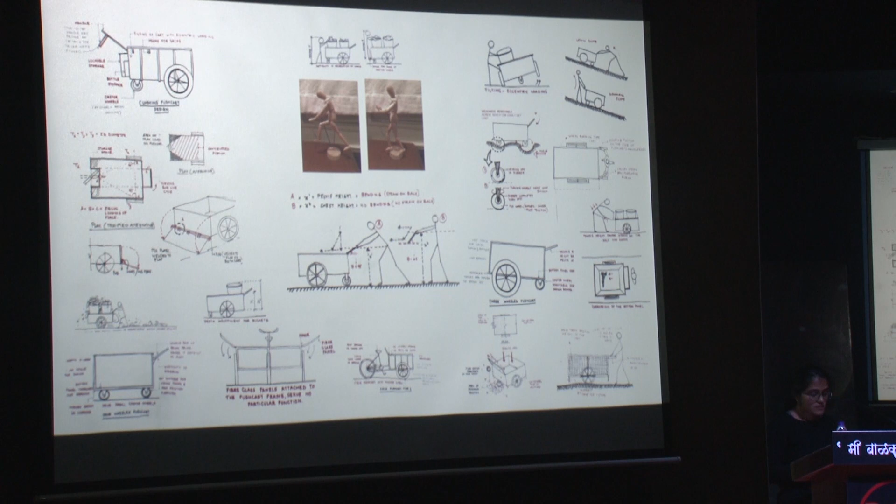So the first part was about understanding the mechanical aspects of the design of push carts, retrofitting existing carts to fit the ergonomic analysis. We consulted physicists, mechanical engineers, orthopedic doctors. It included parts of the cart like handle height, type of tires, non-corrosive material for the chassis, ease of lifting and dragging waste-filled buckets onto the cart, and analyzing waste pickers working in different topographies - uphill, uneven roads, etc.

And it was observed that there were common issues relating to different aspects of the push carts, apart from variations in the topographies around Pune city. So the simplest way to approach the first phase was to retrofit the existing cart, considering lower costs.

The surface that received the most wear and tear was the bottom. So we experimented with aluminum sheets, varied the thickness of the gauge of the mild steel sheets, replaced the sides with perforated CRS sheets to further reduce the weight, and increased the depth of the chassis, so that when the buckets move, there is less spillage in the cart.

Replacing door hinges with gate hinges, all very simple things. Fixing swivel wheels of different diameters and material, like some in rubber, some in PVC, and with different gauges of brackets. The diameter and width of the main two tires was experimented with, and the bearings inside were also experimented. These retrofitted carts were again at the end of 3 months given to the waste pickers to get our honest feedback, and they were very honest with it.

We also developed a bamboo cart, because bamboo is lighter in weight than steel, and this would put less stress on the waste picker pushing the cart, and also less stress on the 3 moving parts below. But this was the most expensive option.

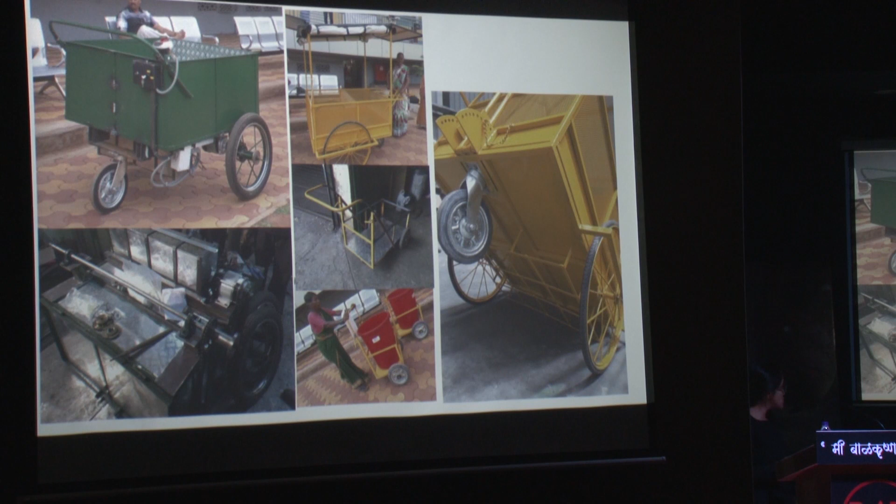Then we developed an electrical push cart with varying speed, where the waste picker could vary the speed and it could run according to their own walking pace. We designed this around 2016 or 17, and it was the most favorite among the waste pickers. If developed today, I'm sure it would be a much lower cost option given the progress in technology. So this is the honest feedback we got from the waste pickers.

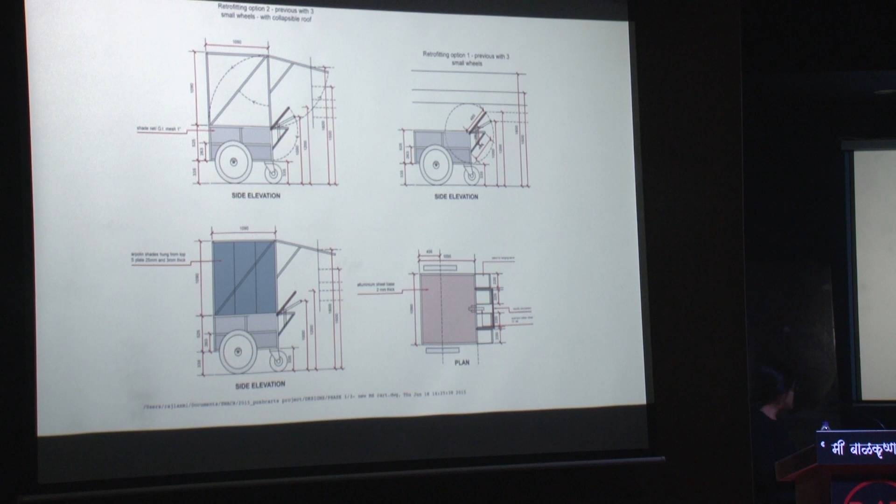Then all the drawings of the 9 prototypes were submitted to the PMC. After a lot of negotiations, about 2,000 or 3,000 carts were made, except for the roof. That was maybe 50% success, you could say. But the loop could have been completed by giving a maintenance schedule for the cart.

Then the second part of designing the infrastructure was a mobile or modular sorting shed for about 2 or 3 waste managers. These sorting spaces are located in different contexts, outside big housing complexes, outside gated communities, institutions, or outside bastis. And there's this constant interaction between the waste picker and residents, who say they don't want sorting happening there.

So then we thought of designing a collapsible and movable mobile sorting shed, which looked decent from outside and where the waste picker could securely store her waste, and which could later be collapsed at the end of the day.

The waste pickers were pretty happy that this was the second infrastructure item designed for them, so they did puja and everything. 10 such mobile sorting sheds were installed across the city.

Then the organization said, okay, now maybe we could propose designs for temporary sorting sheds. So a space for eating lunch, a space for sorting waste, and a space for storing the waste was provided.

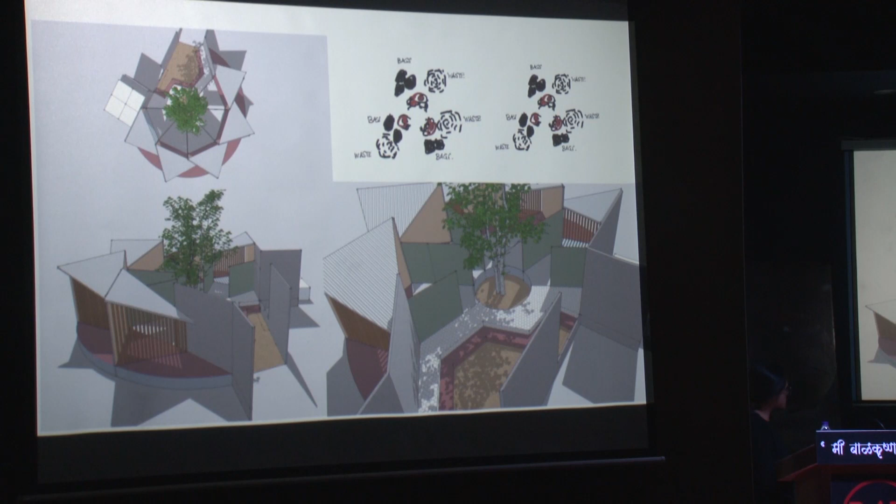One day it so happened that the municipal corporation was proposing an extension for an existing sorting shed for about 30 solid waste managers. The organization said, okay, we could propose a design. PMC was all okay with the design, but said they weren't going to build it themselves, so if we were ready, we could do so. Then I had to assume the responsibility as a contractor to manage the construction process of this sorting shed.

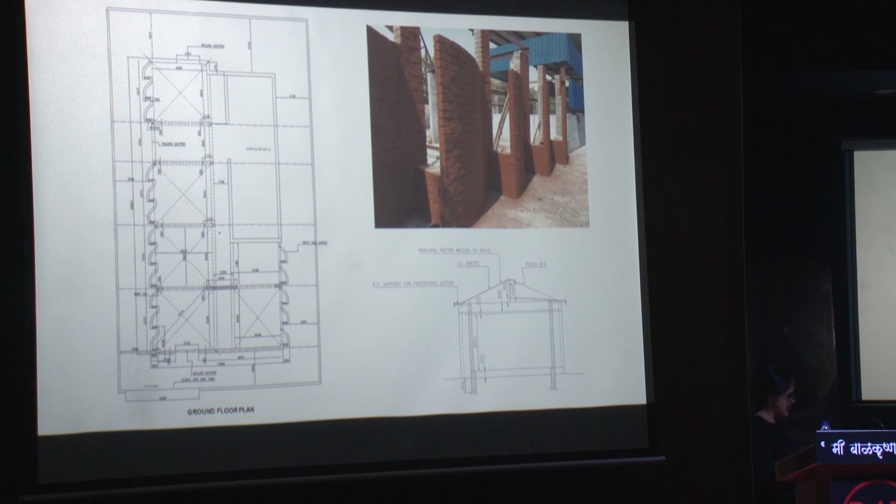Near Kapil Malhar, the design was very simple: the walls are made up of fins that face outside, so a person from the outside is not able to see who's sorting waste inside, while also maintaining plenty of light and ventilation inside the sorting shed so it doesn't get stuffy.

So the effort here was, we just don't provide a patra shed. Maybe we could provide something more, go beyond at every attempt.

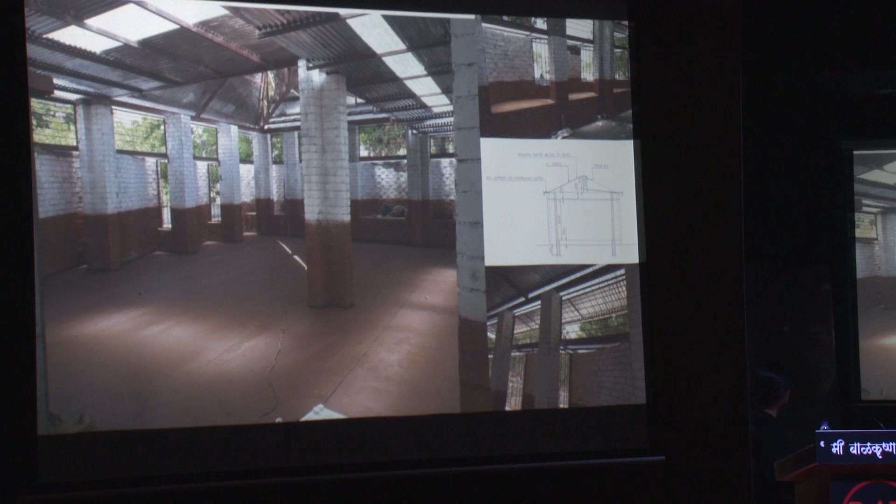This culminated into designing in situ basti houses for the waste pickers.

One day, Meera Waghmare came to me. I had just finished one interior project, and she was domestic help there.

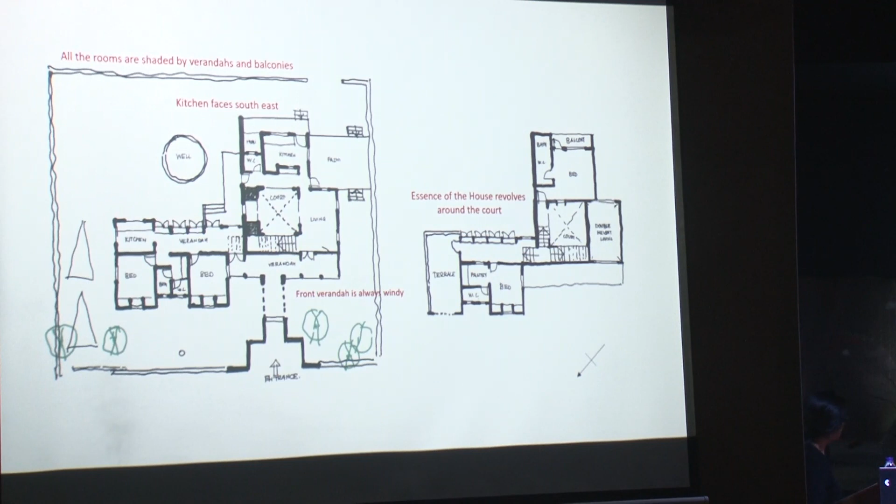The house has a stone wall here. The elder brother stays here and the younger brother stays here. The court is designed for the younger brother, and a deep open veranda is designed for the elder brother.

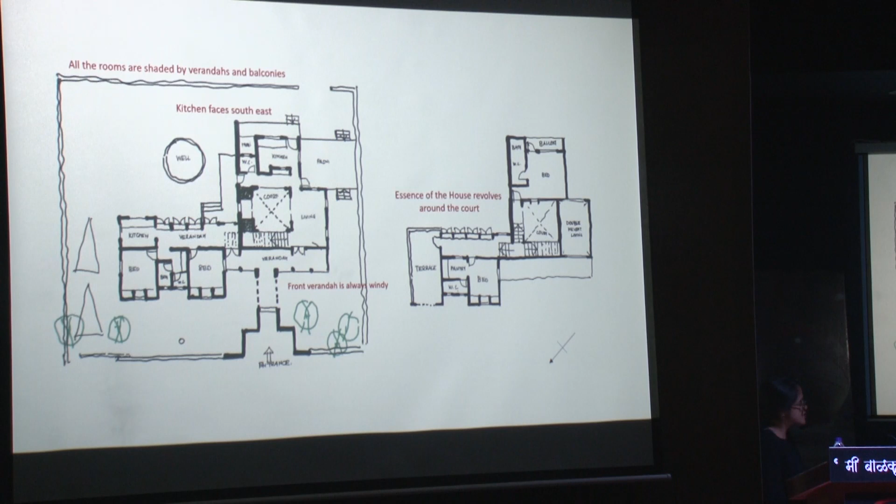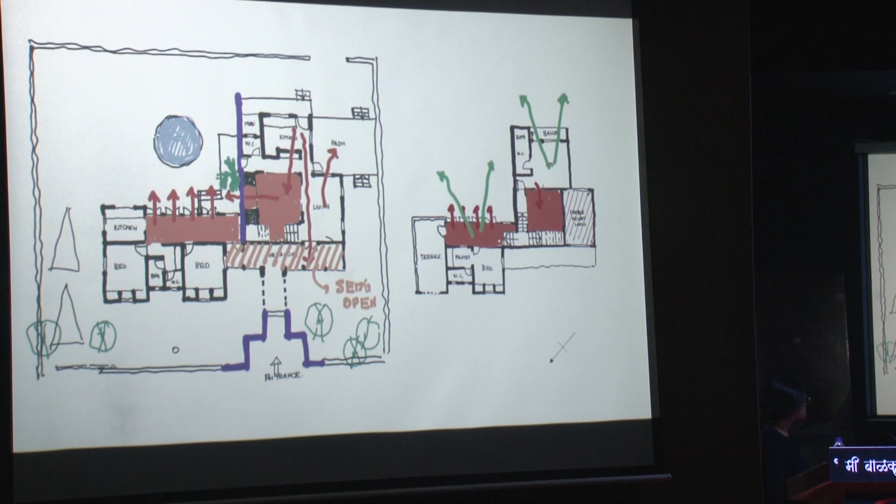So the design was also influenced by the existing well and a coconut tree next to it. And the house is looking away from the main road and towards the farmland. So it is all about, just to simplify it, because it takes a while to explain the plan of the entire house, I'm just going to skip through projects. Looking within, looking out, looking away, looking up, and looking down.

Again, here I wanted to reduce the embodied energy of the materials. We tried different cube tests by adding fly ash and cement mortar, reducing the cement.

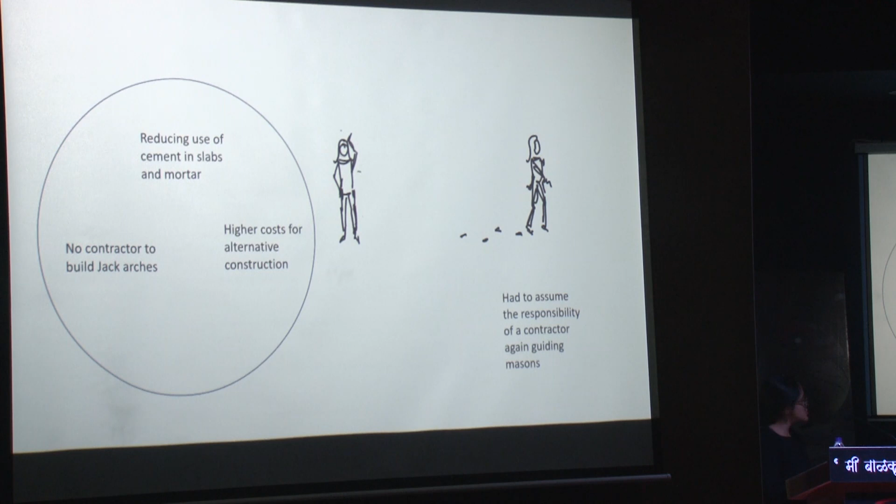And so then this is the project where the use of jack arches started. But when I was asking contractors, could you build this, they were like, no, and they were quoting very high cost for alternative construction. So again, I had to assume the responsibility of training the masons, and being a contractor myself.

So the court becomes a dynamic, unbuilt entity framing the spaces around it. The life within it is as fleeting as the seasons go by. Once the court got built, I felt the effort taken to design was somewhat fulfilled, as the spirit and scale of the neighboring temple court was somewhat achieved. Everyone is looking into the court at different levels while going up and down and just sitting around it. The essence of this house was just this court.

So the house has minimal openings facing the main road, and is just facing the well behind here and the farmland. And the deep verandas protect the rooms from the harsh summer heat.

Then in this other project of designing an agro training center in Kambre Bhor, the client came up with a requirement that there is an existing shipping container. It gets just too hot - I don't believe in shipping containers - and we want to build another, like a multi-usable space besides it.

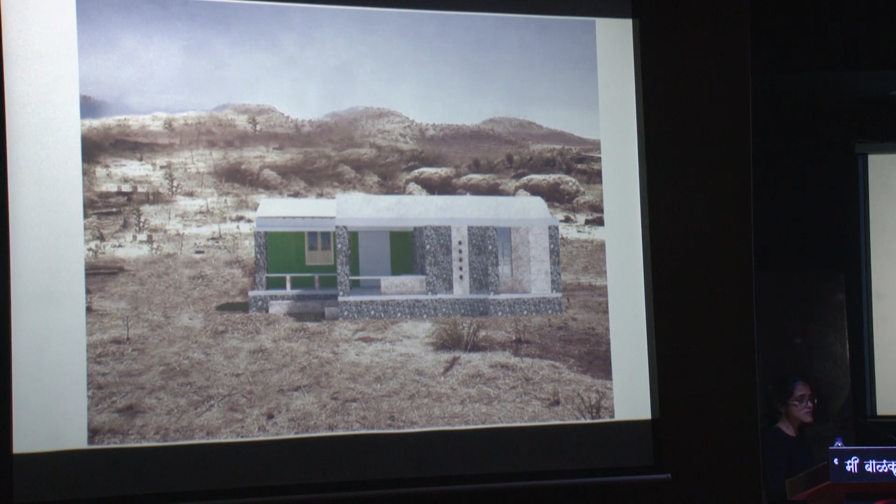And then again I questioned, okay, fine, I can propose this to the client, but then what about the shipping container which is getting hot? Could we use that? So then the second option was developed - maybe we could cover this shipping container entirely, and then this becomes a multifunctional, multi-usable space. And just a small court separates the space, and the kitchen and the bedroom on top are shifted there.

So during the design of this project, I realized that there is a need to have a space which is called as nothing. Just like the court has no particular denoted function, but is the spirit of the building. In Japanese, it is called as 'ma' - something not required but necessary. Here there is ma at two levels, and it's highly moldable and absorbent according to changing requirements of the client, maybe 20 years down the lane.

The apartment at Bugao is a standalone apartment building. And here, I had a strong concept that whatever it may be, I'm not going to use concrete. I mean, people in the past built buildings without concrete, so why not just go completely the traditional way - have a 15 feet deep foundation with 4 feet wide stone walls, just load compressive masonry walls one on top of the other.

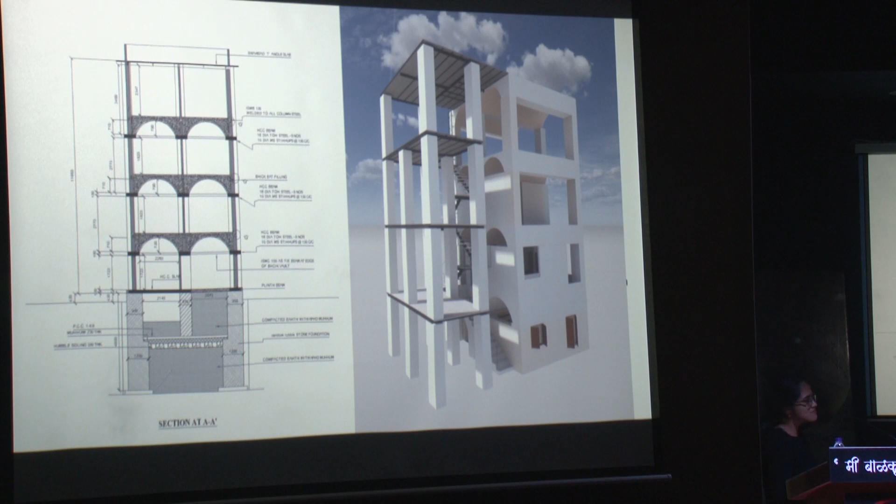On one hand, have a staircase separating this, and have a stone tile metal grade slab on the other. So architecturally the concept was you have a lightweight structural system facing a very heavy structural system.

So again the standalone apartment was somewhat closed from all three sides because there were buildings going to come on the other three sides, and it was facing towards the farm.

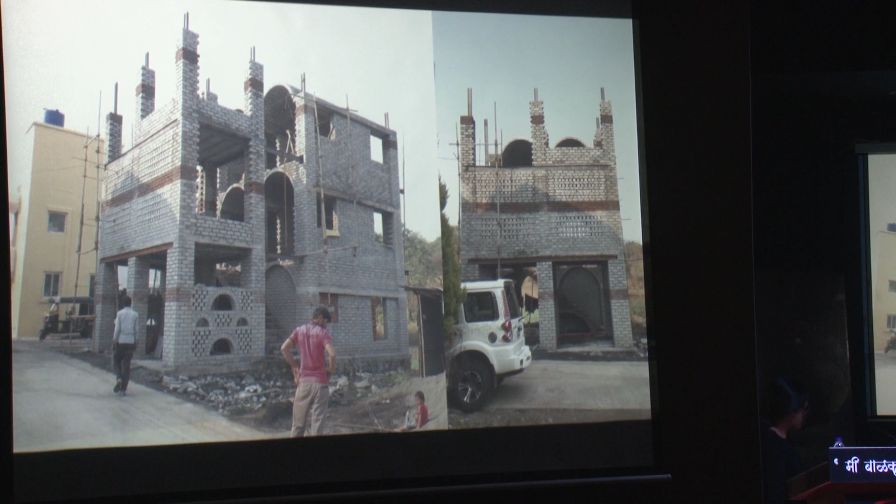I kind of designed this myself - it shouldn't be so, you should be consulting structural engineers.

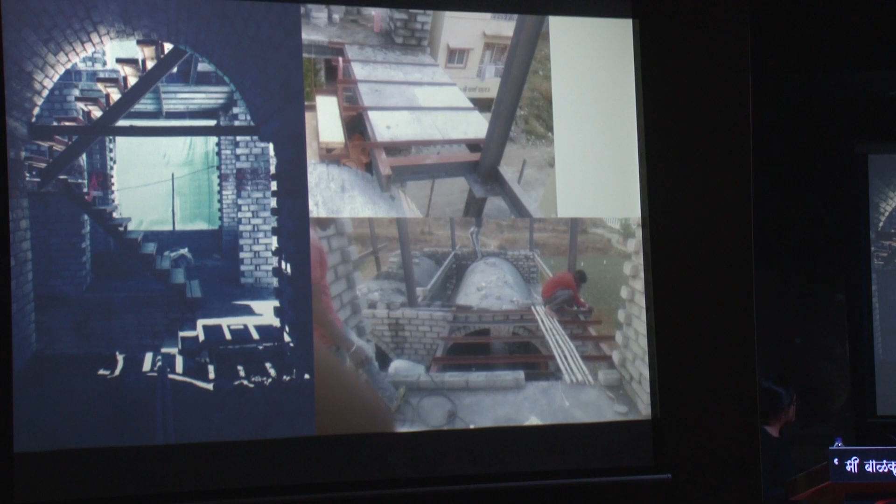And the vault at every level is connected with the composite metal grade stone tile structure. And again, the stilt space - I didn't want that stilt space to be really bland - so a rampant arch was introduced, and the staircase was designed on top of it.

The toilet also was loaded on the compressive vault. Because of this eccentric loading of the toilet wall, we had to strengthen the wall with reinforced ferrocement.

After all this, my heart was pretty exhausted, and my mind couldn't work further on any design, struggling with issues inside my tiny head. As a kid, I used to always race the colony boys on the cycle, and there were stages in between the previous years where the cycle peeped in and looked at me intently. So this time, I just wanted to devote time to her - it's my magic wand, everything gets resolved on the cycle, exploring places alone. And this pause lasted for about 4 years.

Then after 4 years, the same client of the Otur house approached, and he said, could you redesign the Shiv Mandir, the temple complex of the village Kapardikeshwar Shiv Mandir?

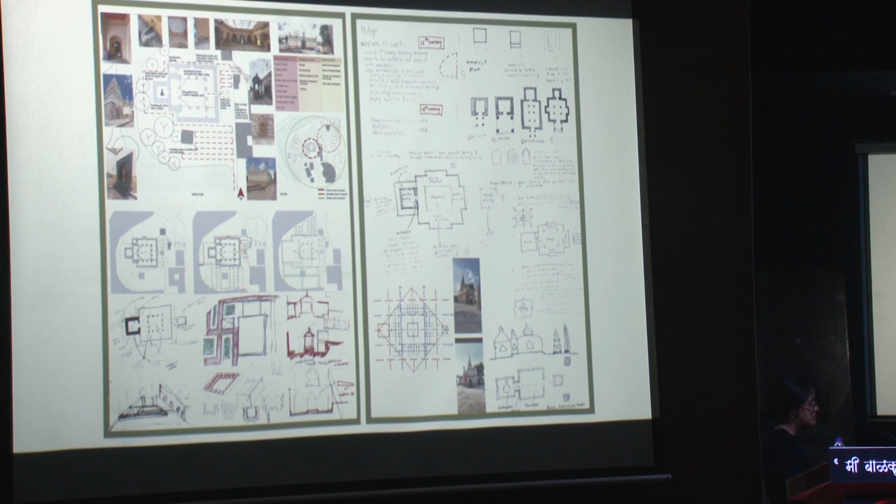We did a lot of historical analysis. We analyzed the journey or the path of the worshipper, etc. And we landed up just again designing built masses along the journey of the worshipper. But this just didn't go down well.

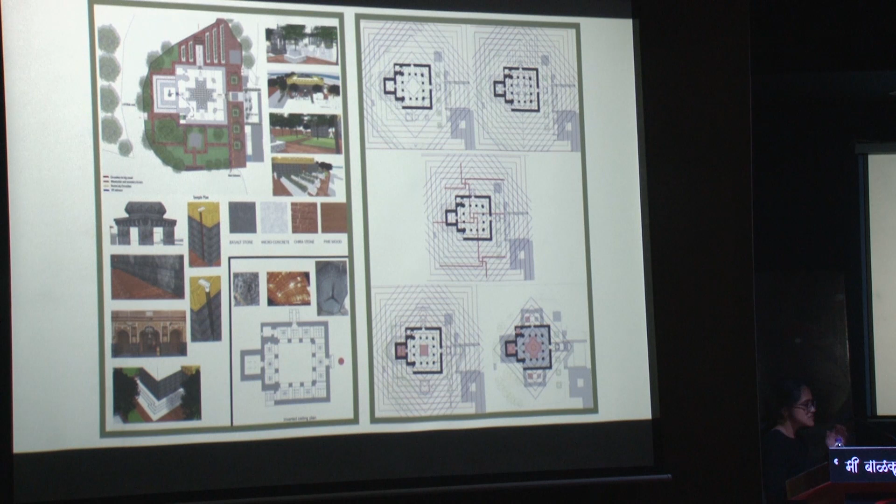So then one day I just visited Trimbakeshwar Mandir, and I was sitting on the boundary wall, just observing the worshippers there. So here you just have the temple in the center.

People are going round and round, doing pradakshinas around the temple. And the boundary wall was just a relief element for the worshippers after they have done their puja. There was nothing between the temple complex and the boundary wall.

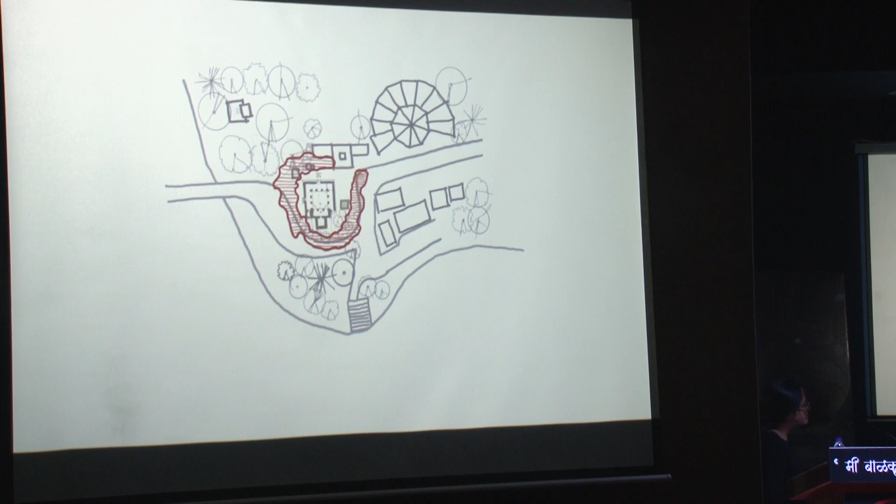And then I just picked up that thread, and the focus here then was just to design the boundary wall of this temple. And the worshippers could mark their own journeys within that temple complex.

The section was simple: there was a wall built facing the village, and then the section lowered along facing the river. And we redesigned this boundary wall.

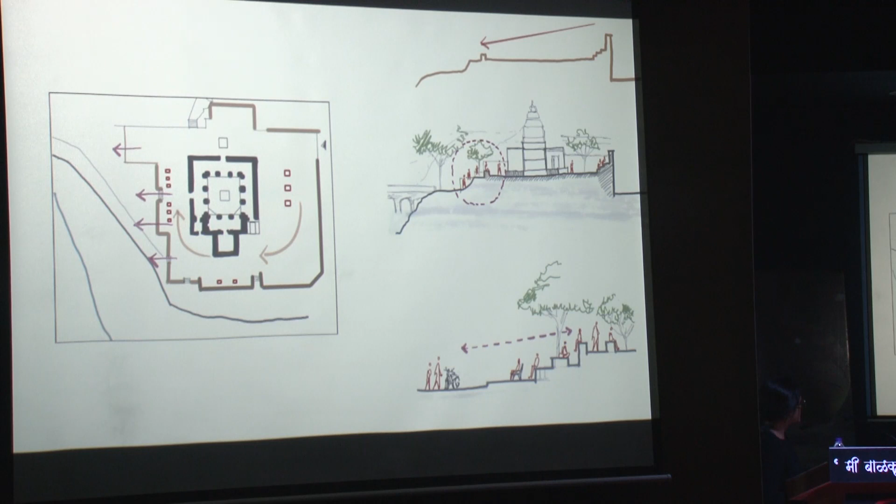Again, seating areas were designed around this boundary wall. And then, I think this is not seen here.

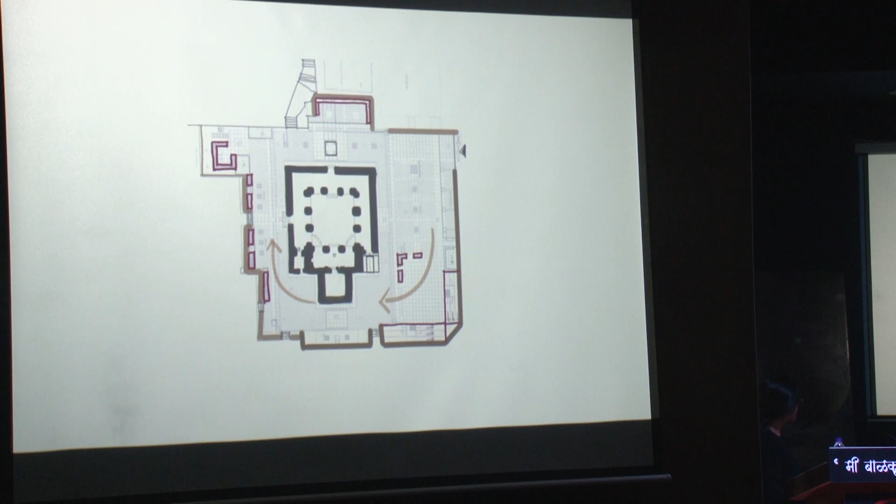So again, how do you find threads for designing the flooring pattern of the temple? So then we just extended the existing grid of the temple columns and the cardinal points of the temple and came up with a flooring pattern.

Sorry, it's not seen in the plan. So this is the wall which is facing the village. The axis of the Garbha, and then there's an opening given in the wall with the Garbhagriha opening towards the river. The existing access to the temple complex was redesigned.

Because there was a limited budget, I felt that the temple wall needed to be porous, but we couldn't invest a lot of money in dressing the stones. So the idea came up that we could use the existing soft stones of the temple plinth and carve out pointed arches, creating openings so that kids, when they step on the last step, could look out from these openings. That became the thread for designing porosity in that stone wall.

This is the river side. Again, there is no wall here. This is from where you enter the temple, and this is the history or the wall for celebration, the presentation wall for the temple. And again, it's a very fluid space.

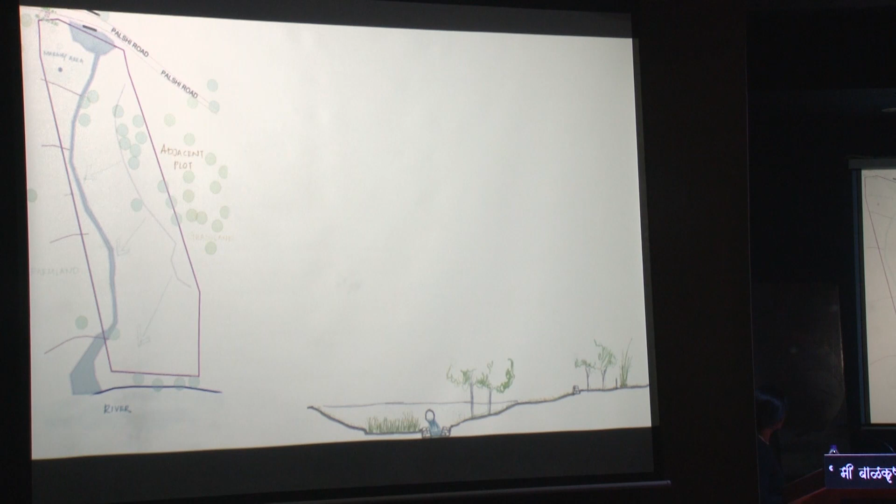This is a landscape for a film director's farmhouse in Palshi gaon, Velle. It's a narrow plot of land where the river is on the south side and a canal flows on the other side. She wanted dense plantation at the beginning, wanted to locate her house near the river, and have a writer's cabin somewhere in between.

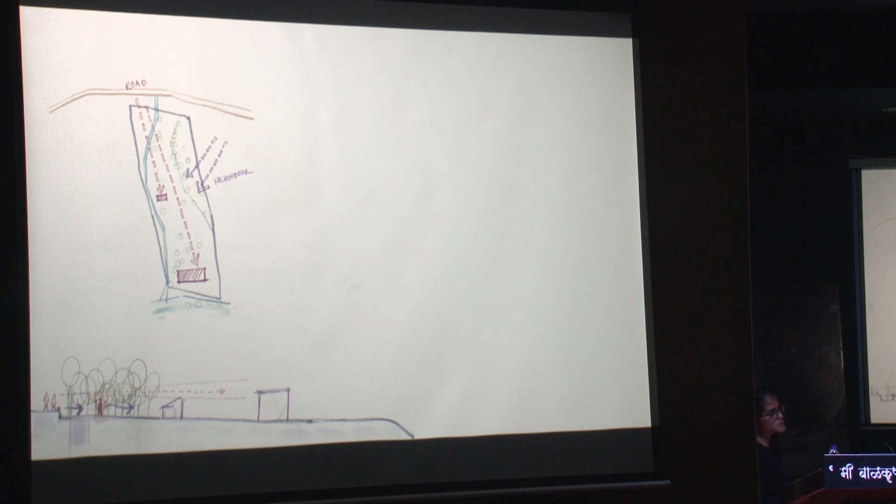So again, she wanted, okay, now let's plan for plantation, just plant trees. We could have just gone ahead with native trees, medicinal plants, fruit trees. That's how it usually happens, you just plant things.

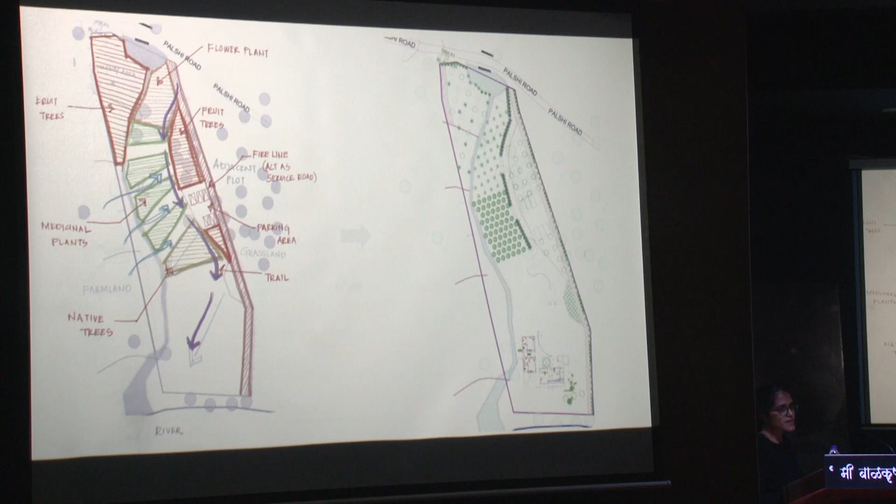But then, when you look out the office window at the landscape and the grid of nature's order, you observe that nothing is in a straight line. So how could you plant trees in a straight line?

So then we developed a grid, a 6 feet by 6 feet grid. In that grid you had one main tree, two shrubs, and one flowering tree. We rotated that grid such that voids, or open-to-sky courts, were formed within the trees.

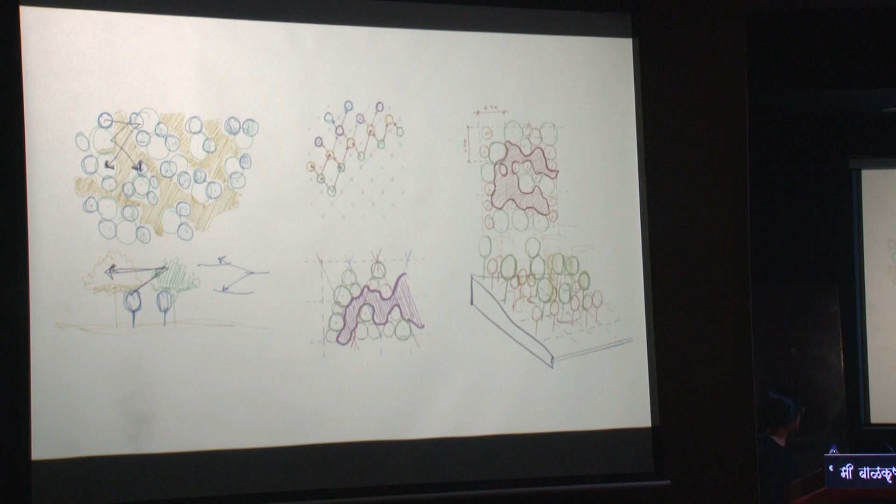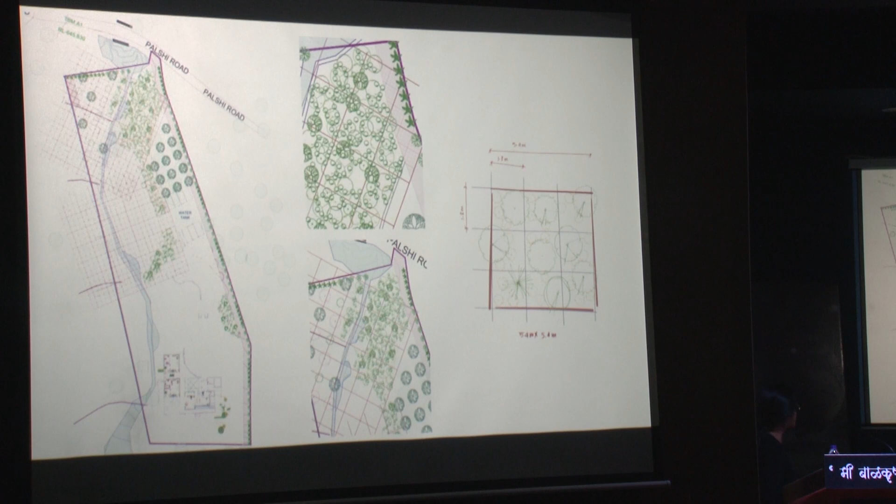And that is how fractal chaos happened in the landscape. It seems random, but there is some order behind it. Then you can mark your own trail and have pause points along the river, and the density of the plantation reduces as you go towards the house.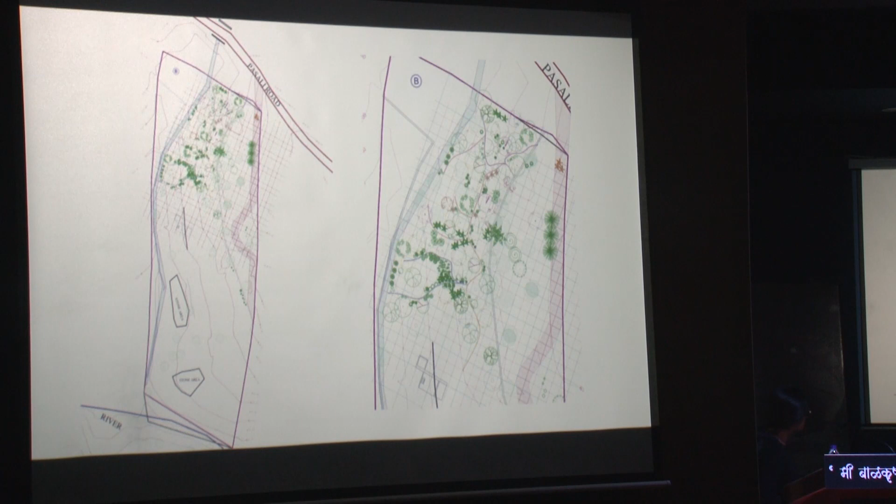This was the final plan. I don't think it's that clear here, but the grid helped us mark a fractal chaos of nature on site.

There's dense plantation at the beginning, and then walking towards the river, the plantation becomes less dense, and then you're enveloped by the surrounding hills. The house is located there, on that barren patch of grassland.

So she said, okay, now let's start with a writer's cabin before starting with the house. Because she's a film director considered a master of light in her field, she's always talking about hard light and soft light. It's very difficult to design a house for her, because anything harsh, she'll say it doesn't suit her. She always talks about flowers, her deep connection with water, and seeing fireflies at night.

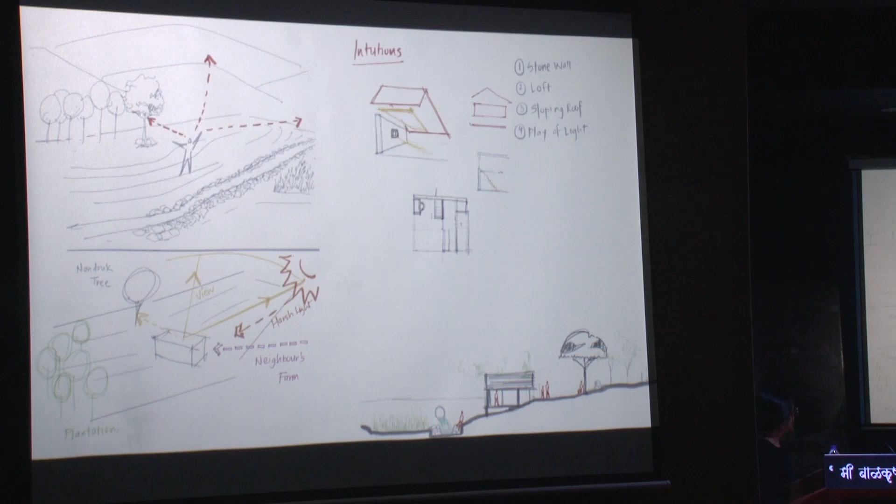There is this particular tree on the side beyond which we've stopped all the dense plantation till this tree, which she calls the twin flame tree, because there are two trees growing with each other. The initial intuition was to locate the writer's cabin facing this tree, with a stone wall, a sloping roof, and just a loft. This is a very simple thing, nothing fabulous about it.

But it led us to the study of the Modulor. So this was the first option: the bed was here, the writer's desk was here, a toilet, and a small kitchenette.

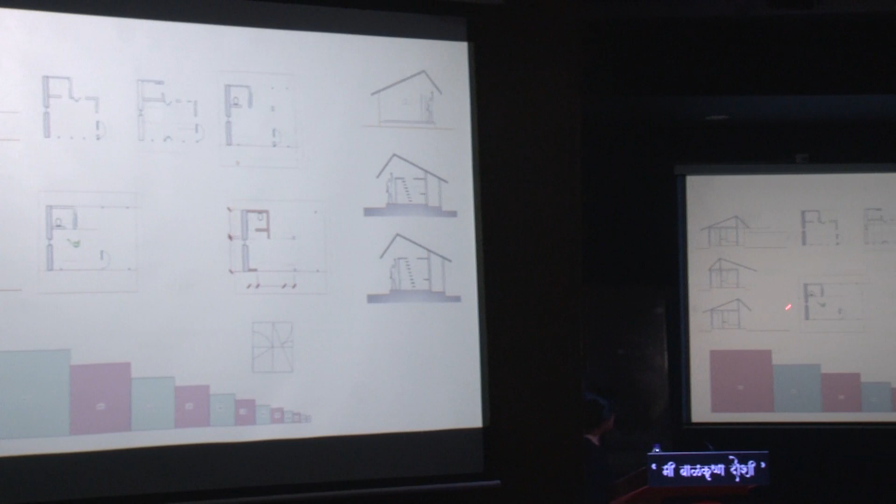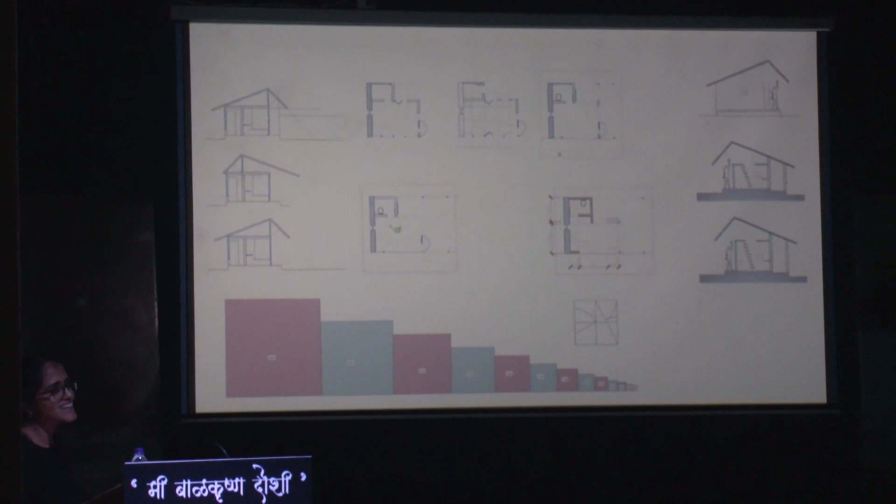How are you going to do this? I mean, live in this space. And we sent this scene to the film director.

This is the final layout for the writer's cabin, where her parents are also going to stay with her, so this gets converted into a bedroom at night. Her writer's desk faces the landscape, a small staircase goes above, a small kitchenette here, and your toilet there.

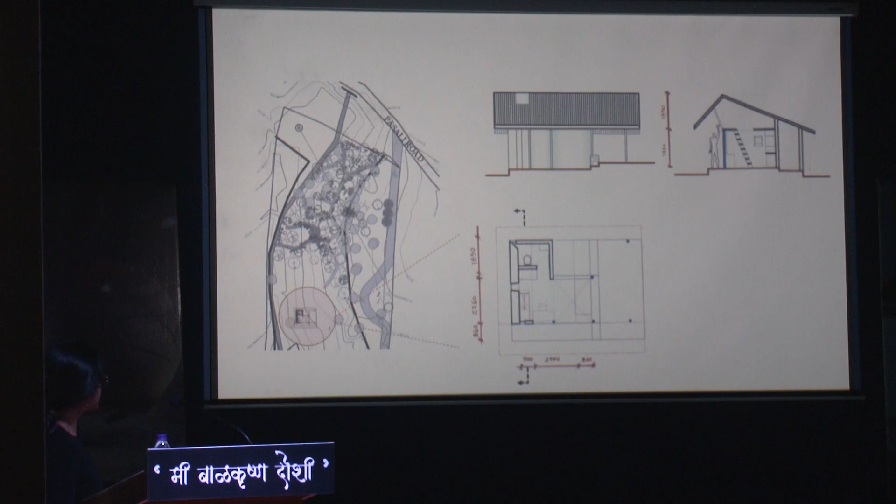Once we had sent her the model, she always loved this loft space. She emotionally connected that loft space to hiding from her mom when she was young. We just gave a small opening in the roof for light.

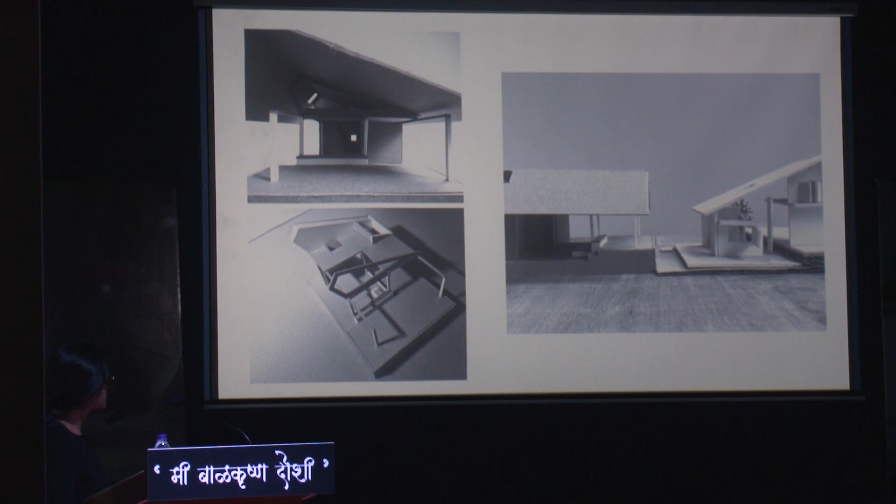We had done a tiny cabin before, so this became a study of comparisons of scale in both these designs. Now we are still trying to figure out how to close this openness of the veranda. What do you do there?

Do you have another build? Maybe the unbuilt solves a lot of issues for us. Is that maybe why not have the landscape just form a mound here enclosing the veranda?

This is still in process. I don't know how long this study is going to go.

This is an agro training center in Katigaon, Solapur. It started about 4 years ago.

Once there are sites outside of Pune city, you don't know the existing built form. So what you do is just roam around the village and try to find threads and understand the existing build. In Solapur, because of the harsh summer conditions, you have smaller courts rather than one big court, with smaller courts as you go deep within the house.

So that was our simple concept for this training center: you have a public court, then a semi-public court, then followed by 2 private courts. And there were these 3 big tamarind trees, so the house had to open towards the tamarind trees and the farm on the side.

In this project, I don't know what to call it, because the client has been changing her requirements till now, as it is also an agro training center and also a space to reside. So I feel that the requirement is highly fluid.

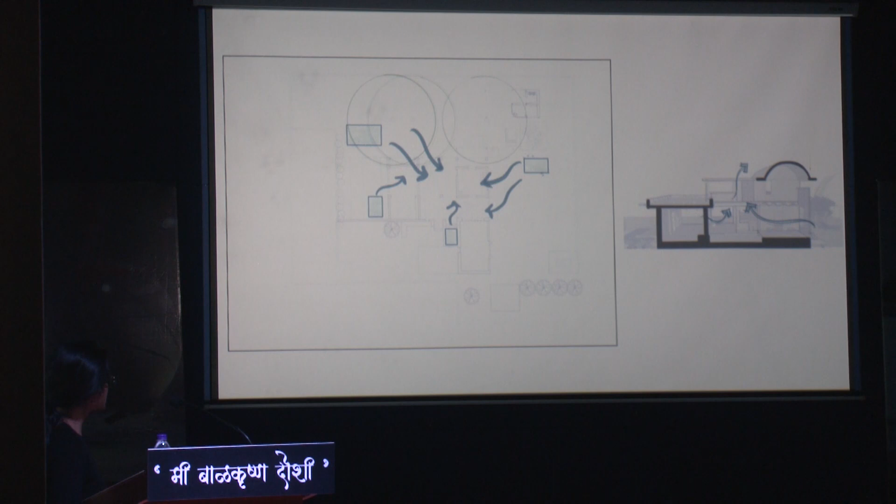And we had to have a flat terrace on top because of the nature of activities happening on the farm, as they dry grains and different vegetables on the terrace.

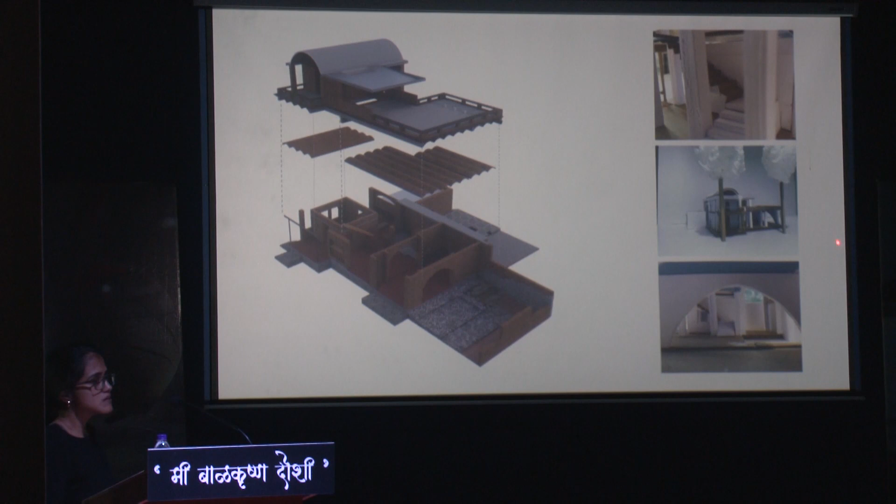But then we tried to calculate the embodied energy of the material used, and the jack arch system was the most efficient system. It also provides insulation from the harsh summer heat, and cost-wise also it was pretty efficient.

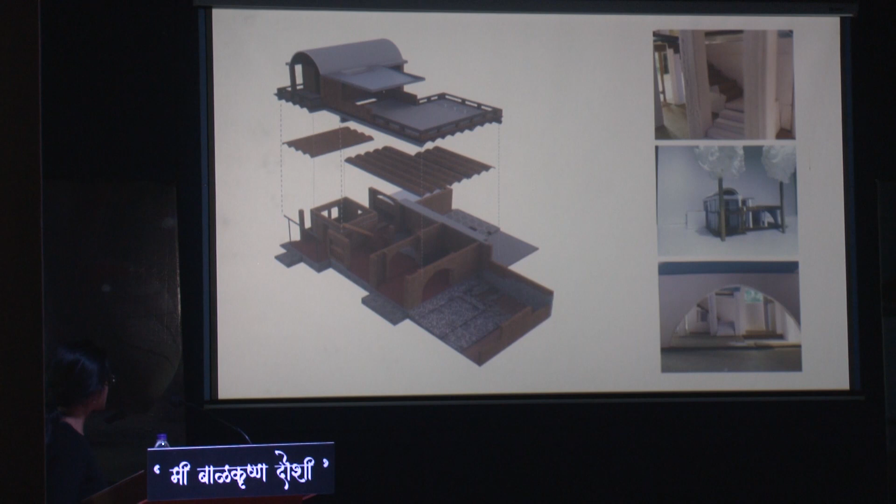So this is the entrance, the public court. This semi-public court, so when the vault comes on, the vault here is located in such a way on the south side that after the noon sun, this court gets shaded after 12 o'clock.

And this double height looks towards the farm.

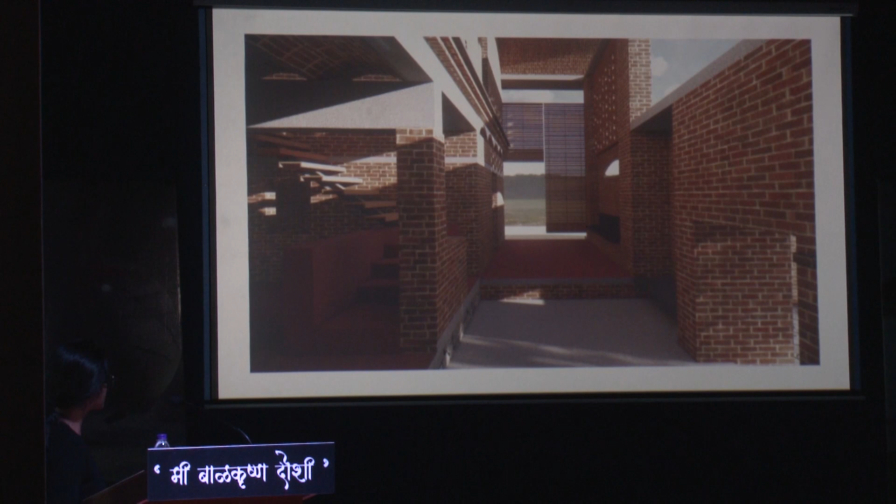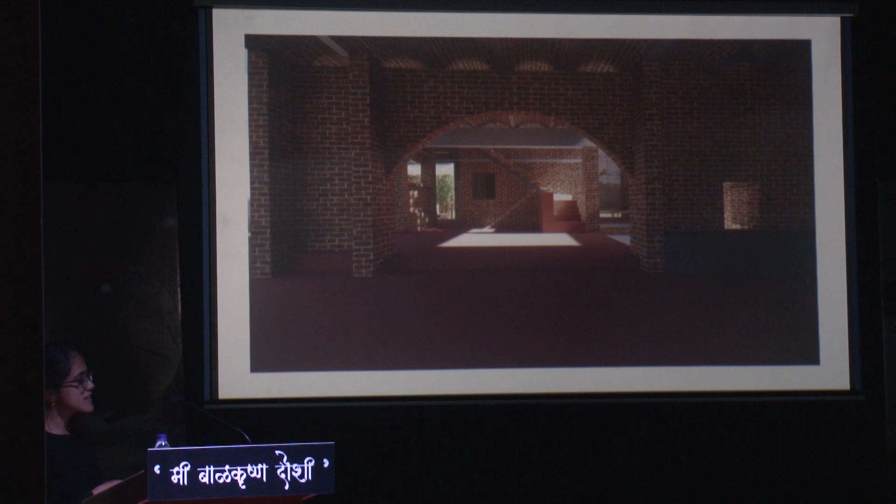And there are no walls defining the training hall or the food processing unit. The walls are just provided where they are required, and the spaces become even more fluid and are articulated by, say, one beam and the arch.

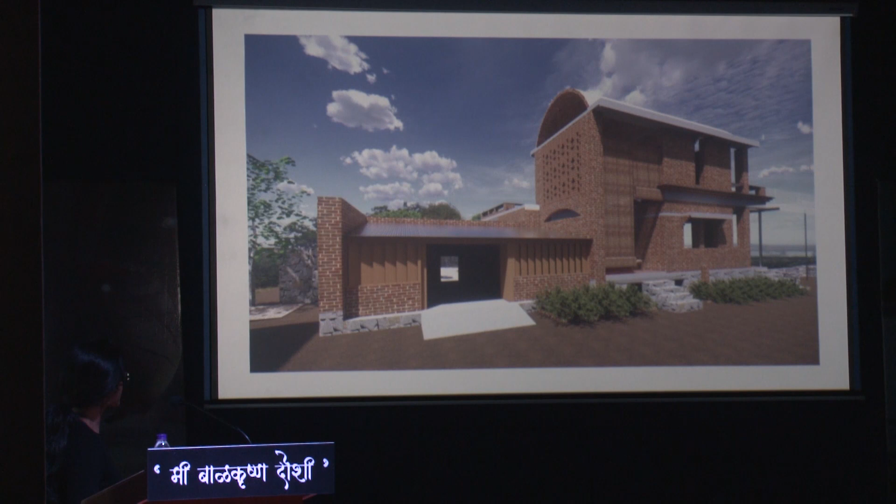This is still under construction.

During a recent visit to Japan, I was really in awe of a spiral brick vault used there, constructed in the 19th century for a tunnel. This is the most stable way that you could arrange the bricks, and they are all interlocked.

So then we were trying to figure out whether we could replicate the same system of arranging the bricks in the wall that we're doing here. You could easily model this on the computer, fabricate it, and 3D print it.

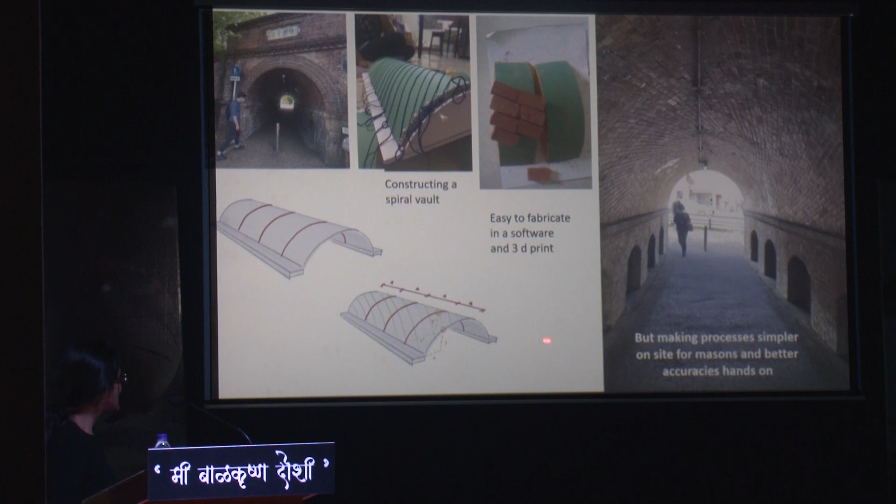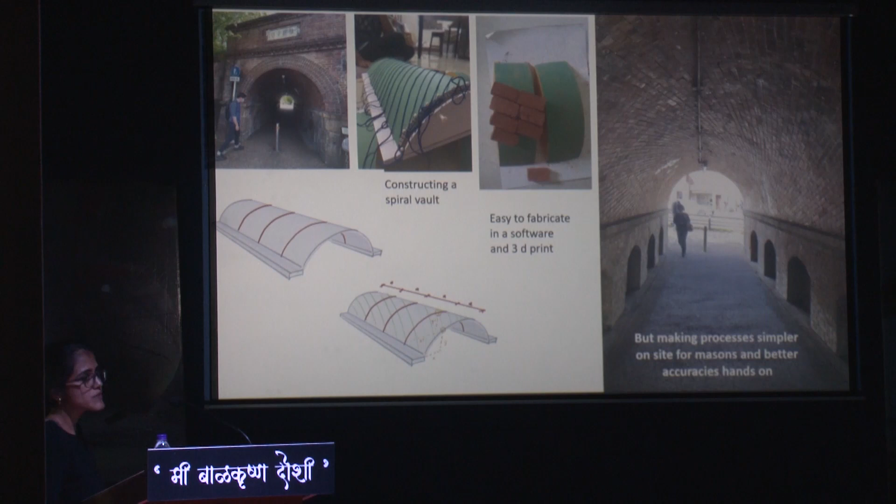But this is located in Katigaon, Solapur, and you have to make processes simpler for on-site masons for better accuracy hands-on. So we were trying different things in the office to map a construction sequence on-site.

Then we had the opportunity of designing the Ozar temple complex. It didn't happen because we didn't want to compromise on one construction detail. But nevertheless, would like to share this.

So then we had to identify different user groups and the natural site conditions, like sinking of the land since it is reclaimed land, sedimentation, the biological oxygen demand, the microclimate, stabilizing the river fauna, the sun angle, the air breeze, etc. All issues and requirements were identified.

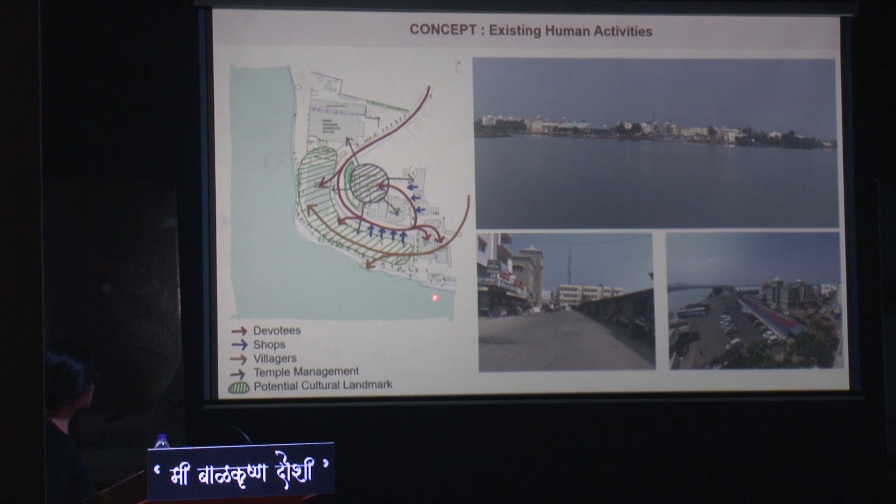So then we identified these design layers that design had to justify everything: ecological, cultural, historical, and psychological. We identified these 5 axes of water, sense, fire, air, earth, and interspersed these with wetlands. Again, the play of the built and the unbuilt. We had to find a balance between human activity, which is also a cultural heritage, and the ecological issues of restoring ecosystems.

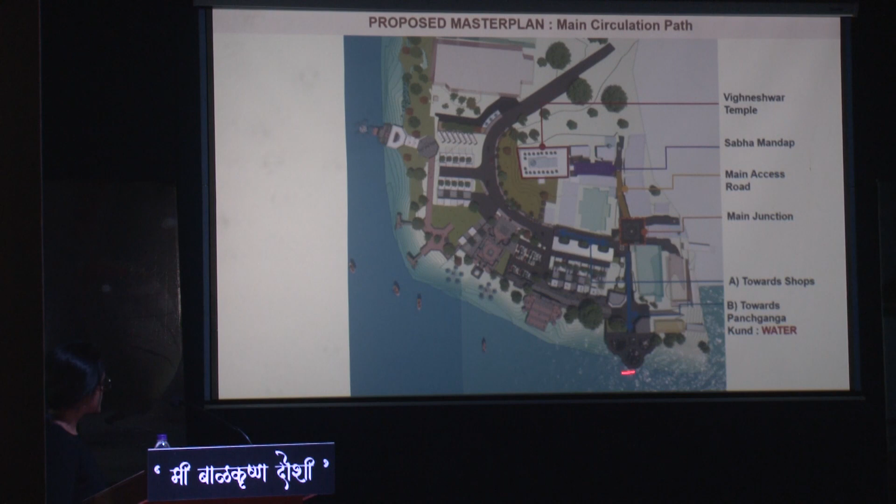So this was the final plan for the proposal. The temple complex, the Sabha Mandap, which is open, faces the temple complex. This main axis takes you to the Nirmalaya Ghat, where you can dispose the Nirmalaya, which is barricaded on all sides. This is then filtered, and the garbage and Nirmalaya is removed. The villagers also could use this ghat for bathing.

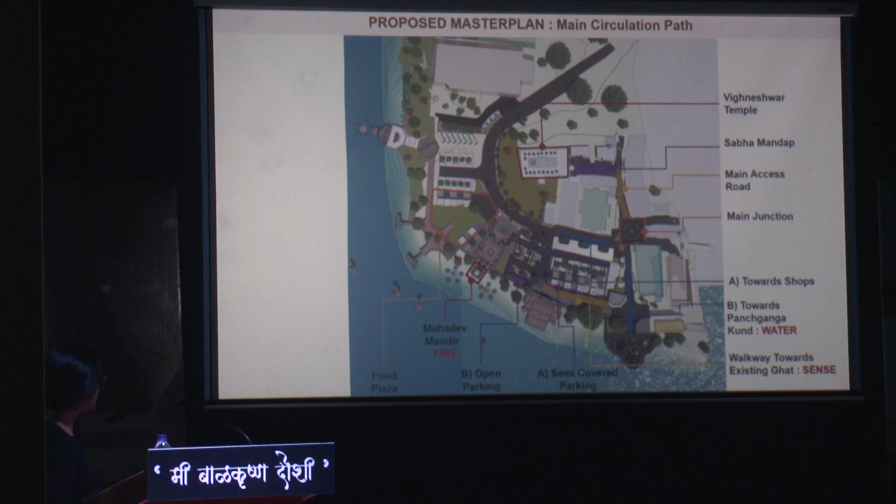Then a connection was established to the other ghat, an existing ghat, which was redesigned. This is called the Ganga Ghat, or the Ganga Aarti Ghat. We had to relocate an existing Shiv Mandir and call this the fire axis, with the Shiv Mandir looking towards the Shikhara of the temple. We provided these open spaces because there are always melas happening in the temple complex.

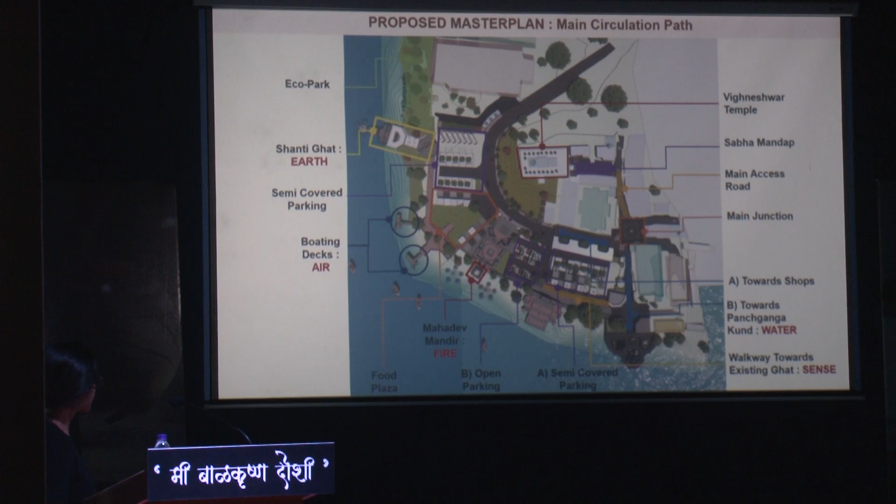We intently provided these open spaces to be used in multiple ways. And another ghat called the air axis, which is used for boating, and a Dashakriya ghat, which is the axis of the earth. So this was the proposal.

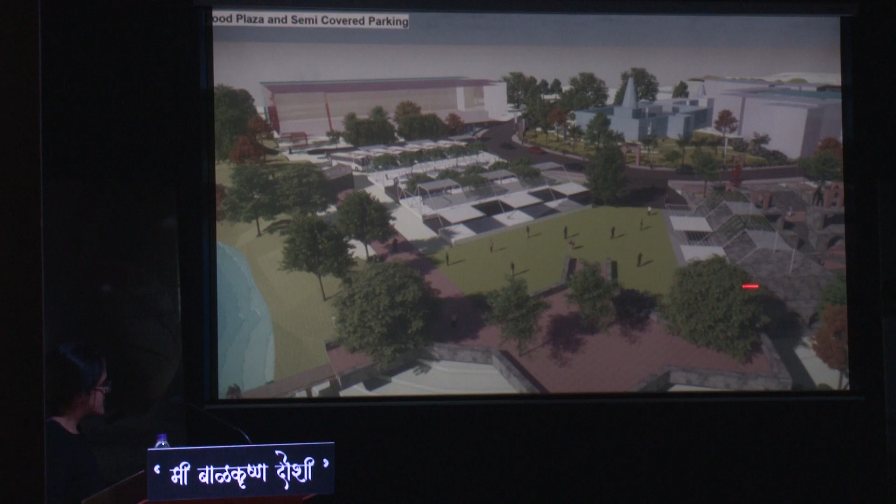They wanted covered parking, and it's useless to have wasted material on top of cars. So we wanted to use that first floor as a recreational space, where you could also have cafes, interspersed with trees.

This is the axis of fire. You have plazas looking towards the waterfront, and a small pathway connecting these ghats. The existing Ganga Ghat was redesigned by having pause spaces on the sides and defining it with this entrance.

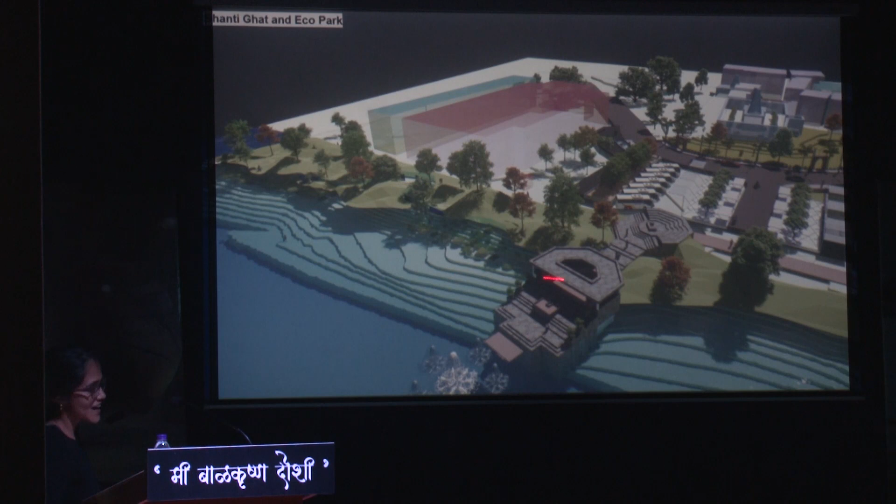Again, a very lightweight parking structure. People are fascinated with the term eco park, but the actual concept behind it was to not build anymore. When we proposed this project to the client, they expected it to be really high cost, but when we told them the actual cost, they were surprised. They said, this cannot be true. Because the unbuilt really solves a lot of issues in design. It seems to be built, and this was a small amphitheater for the local village panchayats to take place.

The axis of fire: so you step down. The Shiv Mandir is located at a lower level near the water. As you're entering, this becomes a space of celebration, just as observed in the previous Otur temple design. There is no fixed entry provided here; there are multiple entries, so you can take multiple paths to go below.

There were these 8 alcoves designed to symbolize the Ashtavinayak, and a celebratory wall designed that could be lit up and celebrated during different festivities.

Now I'd like to share this journey of working with wood. I remember that in my first year, we were asked to design a door handle. I had this idea of designing a door lock in wood, so that as you open it, the door lock becomes part of the door handle. I still have that with me, and I'm not able to resolve it because probably I don't have the skill set of working hands-on. So it's easy to scratch upon, but difficult to shape wood for its proposed functional use.

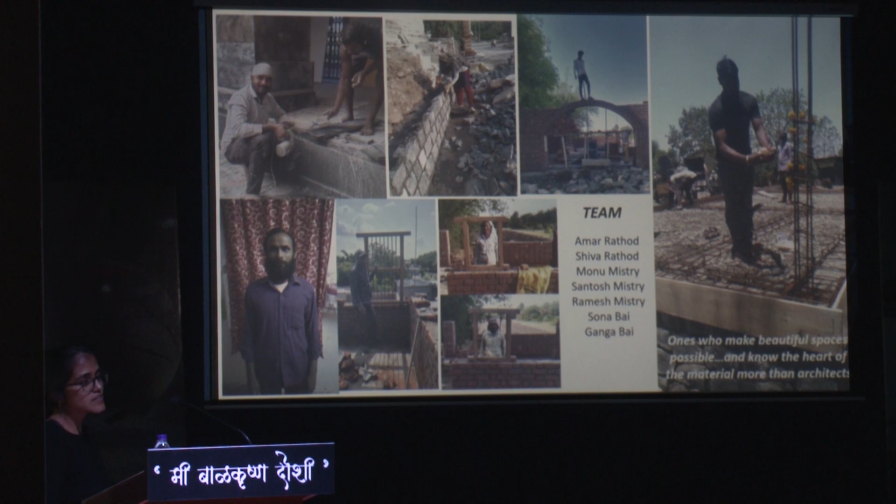And so this has been the journey, and now I've realized that it's more inwards. And maybe one lifetime won't be enough to find oneself. Thank you.

I guess, wow. It surely is interesting and a very diverse array of works. And I'm sure all of us want to know more and want to understand the process, but we'll get back to it further in the program.